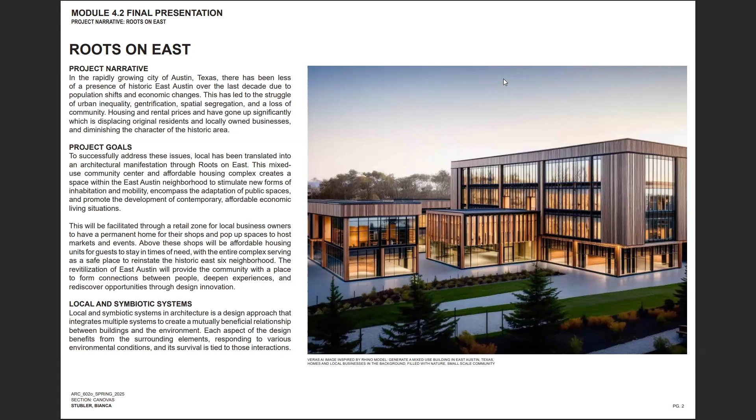To successfully address these issues, local has been translated into architectural manifestation through Roots on East. This mixed-use community center and affordable housing complex creates a space within the East Austin neighborhood to stimulate new forms of inhabitation, mobility, encompass the adaptation of public spaces, and promote the development of contemporary, affordable, economic living situations.

Looking at Austin on a regional scale, there are a few prevalent aspects to note. The Colorado River, which runs west to east, directly south of East Austin, and Interstate 35, which travels north and south just west of the site.

The climate is humid and subtropical, which is characterized by long, hot summers and short, mild winters. Houston, Dallas, and San Antonio are three well-known big cities located north, south, and east of Austin, between 1.5 and a 3-hour drive away. Austin has grown over 33% in the last 10 years, challenging the infrastructure, causing congestion, and diminishing the preservation of culture.

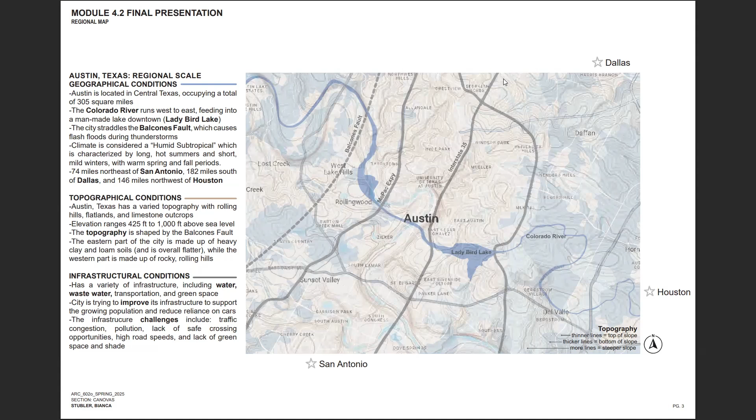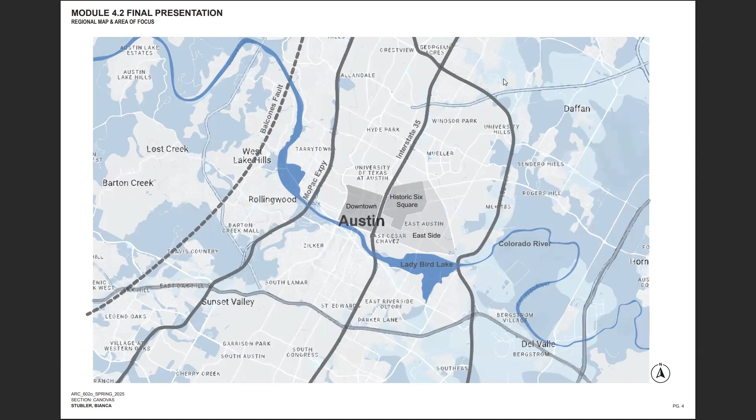Zooming into the map, downtown Austin is situated on the left of Interstate 35, while East Austin is placed just to the right of Interstate 35, with historic 6 Square mapped out within it. The district scale dives a little deeper into the neighborhoods of downtown, East Austin, and the historic 6 Square that we will be focusing on.

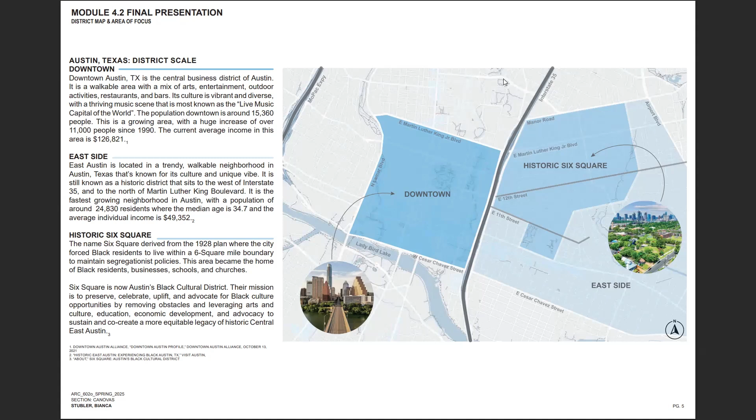6 Square is currently Austin's Black Cultural District. Their mission is to preserve, celebrate, and advocate for Black culture opportunities by removing obstacles and co-creating a more equitable legacy of historic Central East Austin. This project goes hand in hand with that mission, looking to preserve the historic culture of East Austin and the original residents that reside there.

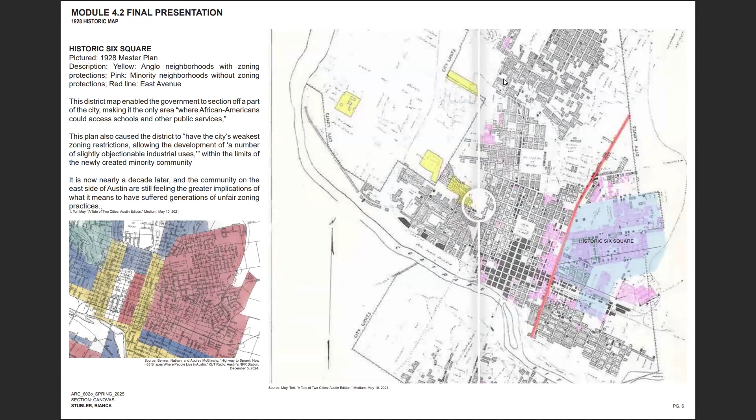Further breaking down the location, the site sits between East 11th and East 12th Street, which are the main roads that connect downtown to the east side. The site is noted in blue and is surrounded by residential, commercial, and historic zones. Adjacent to the site is Austin's Historic Cultural Center, which will have direct relations to the final project proposal.

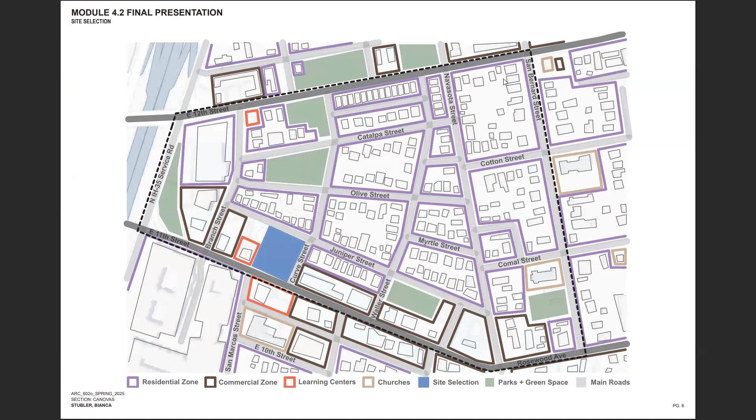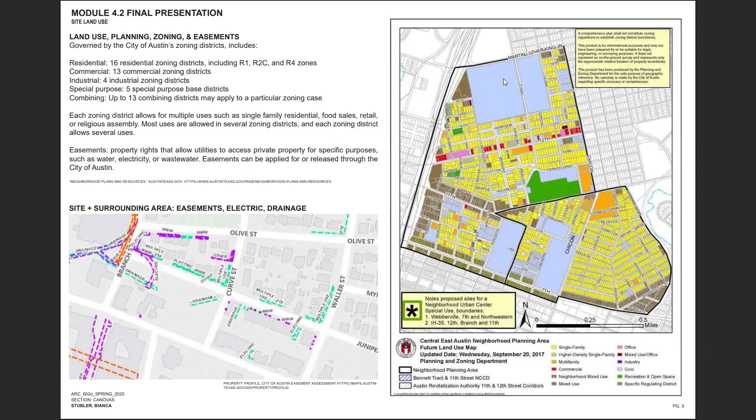East Austin has been transitioning from small to mid-rise buildings over the past few years, but still maintains a lower height restriction than downtown. The zoning in the area allows for residential, retail, and commercial buildings, with our site located on a neighborhood mixed-use planning area.

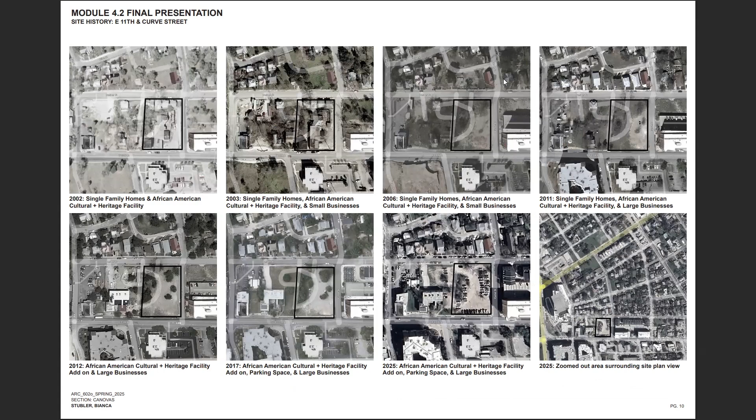These plan view images reflect how the site has changed over 23 years from 2002 to 2025. Up until 2003, the area was all residential until those homes were demolished and turned into a parking area for nearby retail and historic centers.

Opportunities seen for the site are the high walkability due to its location, the large plot of land that is currently vacant, and zoning allowing a mixed-use building that can maintain the culture of East Austin and keep the original community and historic elements in place.

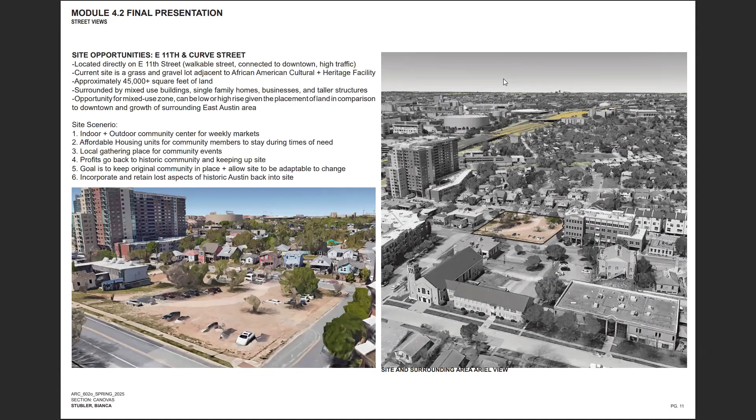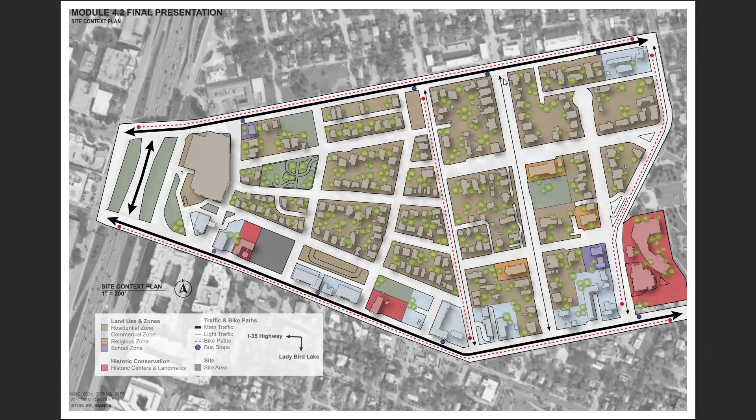To give some more context, highlighted in this map are the residential zones in brown, commercial zones in blue, religious zones in orange, school zones in purple, and historic centers in red. The main traffic is on 11th and 12th Street, with transit stopping along those roads, as well as the bike lanes on those same roads.

This is important to note since the selected site sits right on 11th Street and will have lots of activity going on around it.

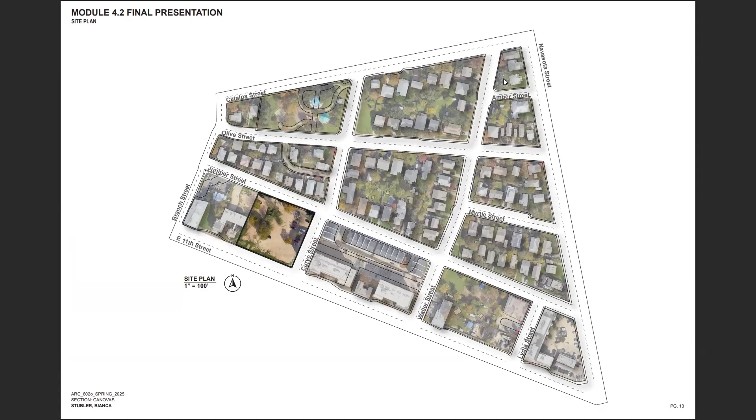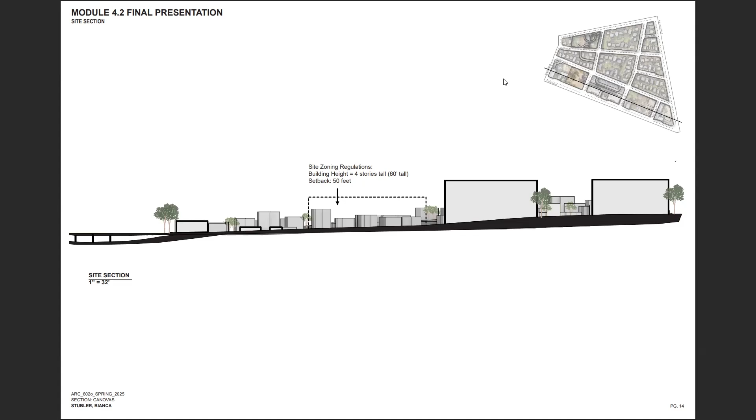The regulations for this plot of land are 4 stories tall with a 50-foot setback. This section shows a proximity to I-35 and a minimal elevation change in the neighborhood.

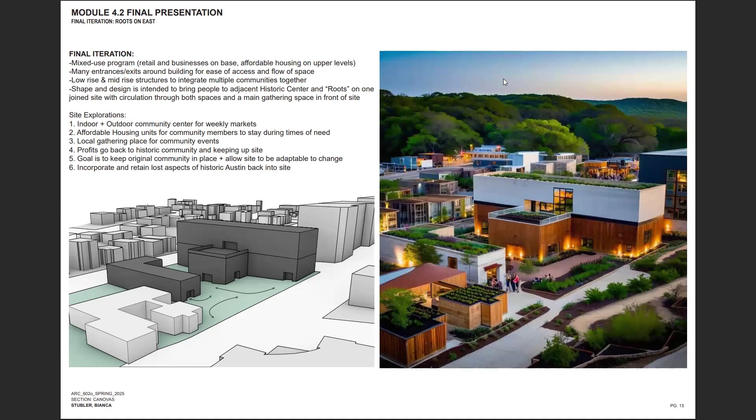After conducting the research and doing my own investigation on the site, the final iteration of the project consists of a mixed-use program with retail and community center on the base level and affordable housing on the upper levels with shared patio spaces to integrate the community together to offer a space for connection, reflection, and cultural richness carried on from the past. The shape of the program was created to bring people to and throughout the site, with circulation

between Roots on East and the adjacent historic center to encourage users to explore both. The main gathering space out front connects these two spaces and is open for many different uses and gatherings. Everything in blue and red are public spaces, while the brown and gray highlights are private and patio spaces.

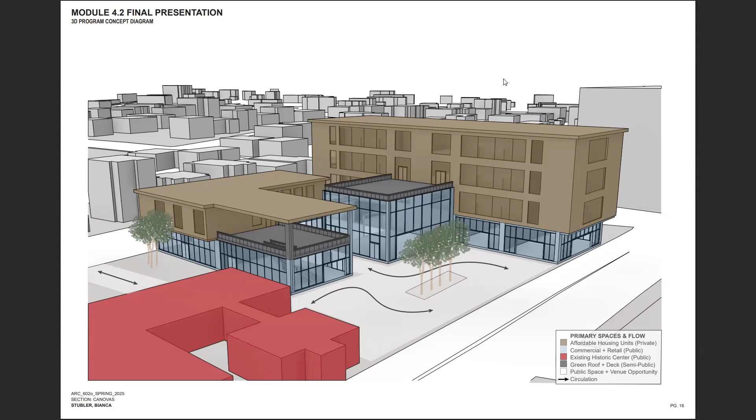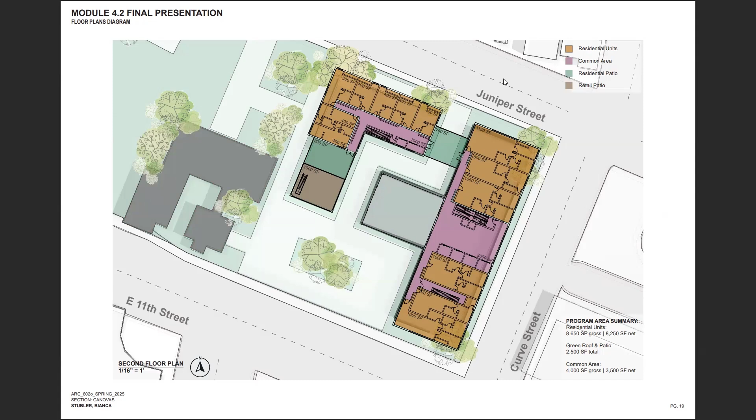The bottom floor consists entirely of public areas with connections and walkways between all zones. Floor 2 transitions into the housing units and patio spaces, and the third and fourth floors almost directly mirror it as well.

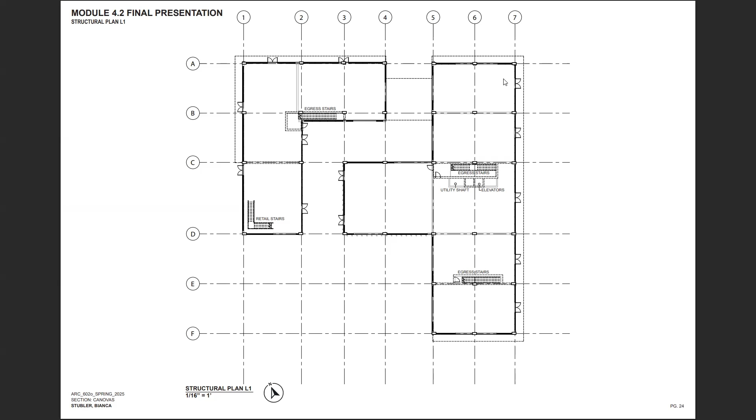Moving into the structure, this section displays where the columns are placed throughout the building and how they will work within the space. From the plan view, there are 56 total columns in the building, strategically placed to cause the least amount of disruption to the circulation of the building, mostly lying next to load-bearing walls and in the corners of the buildings.

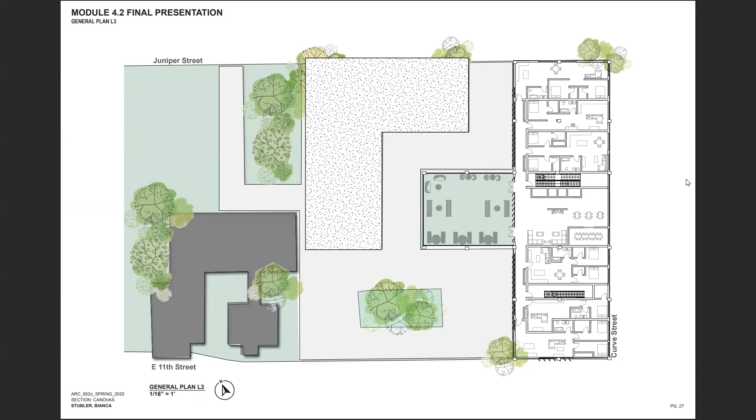The general plans get into the specifics of the hypothetical interior setups and how the spaces are connected together. The second floor includes all the various units, which range from studio to two-bedroom layouts, inclusive to all users in the community. The third floor is designed with a residential patio that is directly accessible from the interior spaces and leads into the community shared area inside that is available to every floor.

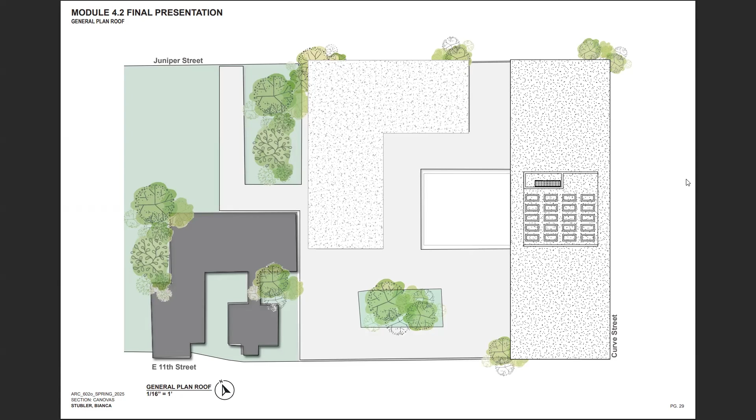Since the exterior of the building is composed of glass, natural light is brought in from the outside directly into the hallways and into the units to allow for ventilation and sunlight into the desired spaces. The roof also includes solar panels and mechanical boxes that are incorporated into the design to be flush.

Looking at a few of the units close up, you can see how the exterior sunlight flows directly into the units. There are 25 total residential units in the building, all under affordable housing and assessed by the Austin City Council.

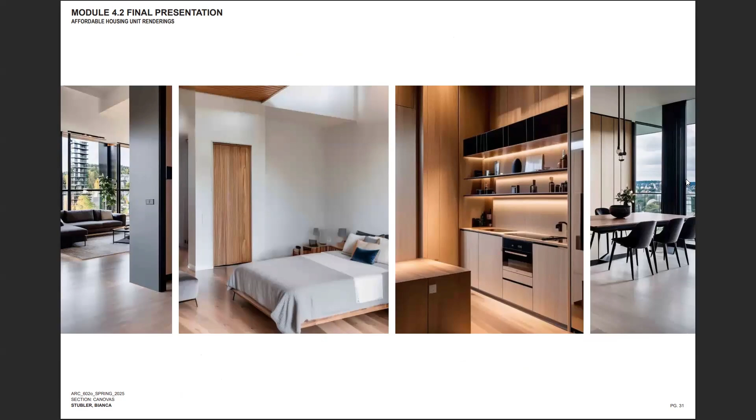These renderings show a glimpse of what can be expected within the interior units from a living room view, a bedroom, a kitchen, and a dining room overlooking the city.

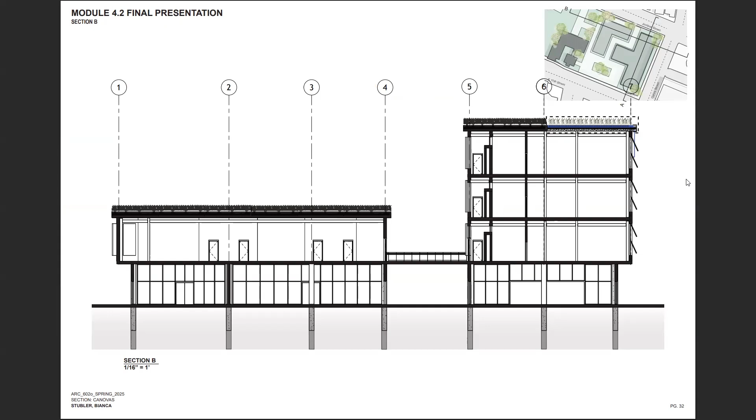This section cuts through the units, displaying how the sun travels from the exterior into the units from both sides for maximum ventilation and natural lighting.

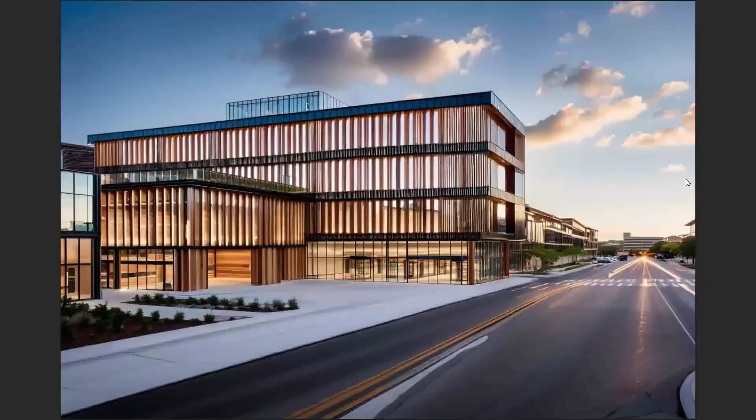This is one of my favorite views, as it displays Roots on Austin within the East Austin community, highlighting the main focus of keeping the structure true to the size and aesthetic of the neighborhood, promoting its sustainability factors that I will get into in the next slide.

Given the location and the climate, passive design strategies were a must for the design program. The main measures taken to mitigate excessive heat were properly shading the building, using natural ventilation, and using both roofs as a green roof system.

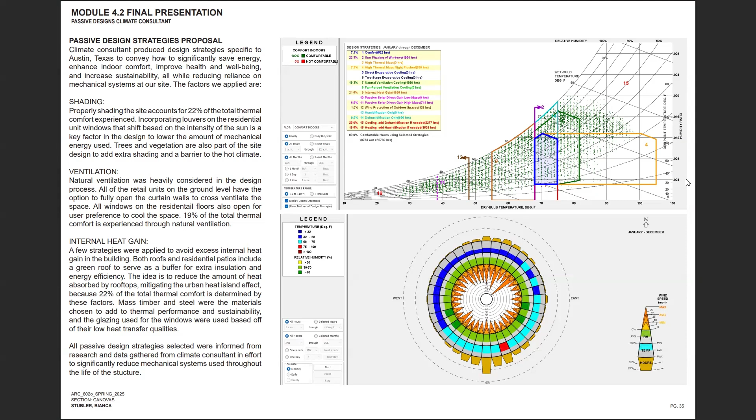Looking into specifics, shading louvers were placed on the south and west sides of the glass structures due to the direct sunlight that enters the building from these directions.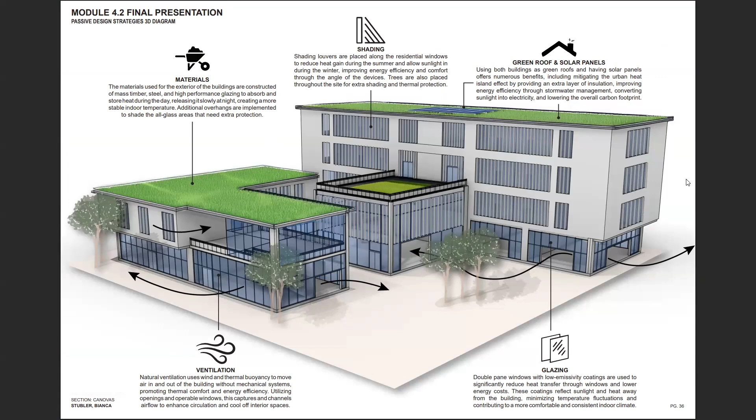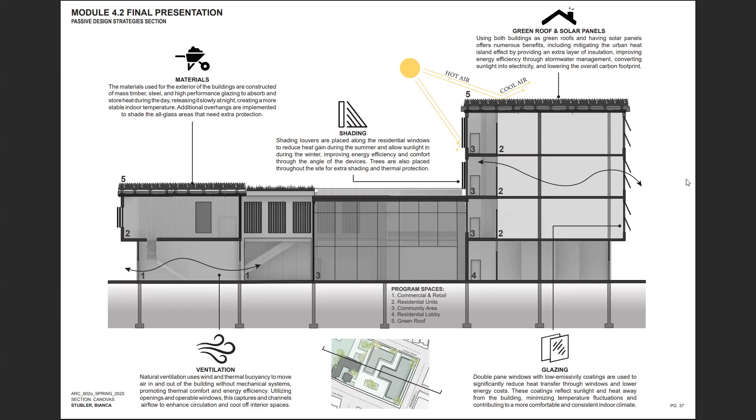Green roofs and solar panels were used for an extra layer of insulation to improve energy efficiency and lower the overall carbon footprint. Ventilation is a focal point of every unit, with openings and operable windows in place to enhance circulation, and double pane windows with low E coatings were used for the makeup of the glass shell to reduce heat transfer. The building is composed of mass timber and high-performance glass, keeping sustainability at the forefront of the design.

The integration of technology was implemented into all units, again with intentions of conserving energy and producing its own energy through the passive design strategies put in place. This exploded diagram displays where each system lives and how each floor is made up within it.

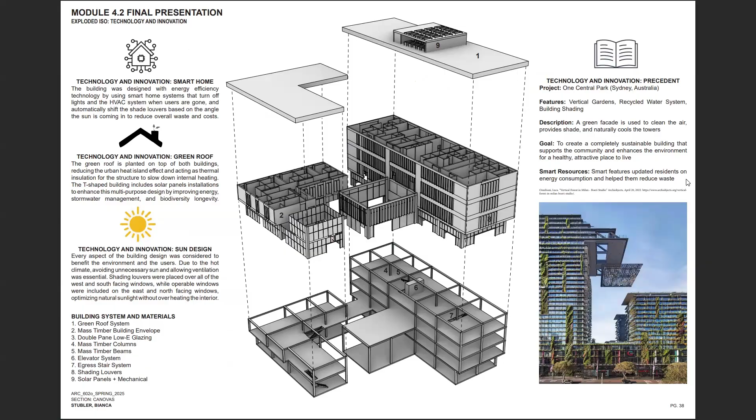In a time when displacement and disconnection threatens the fabric of many urban communities, Roots on East stands as a testament to the power of intentional design rooted in equity, history, and belonging.

By creating a space where people can gather, heal, and thrive together, this project not only challenges the forces of gentrification, but actively reclaims place and identity for those who have long called this neighborhood home.

It is both a shelter and a statement, a living reminder that communities deserve spaces that reflect their past, support their present, and empower their future.